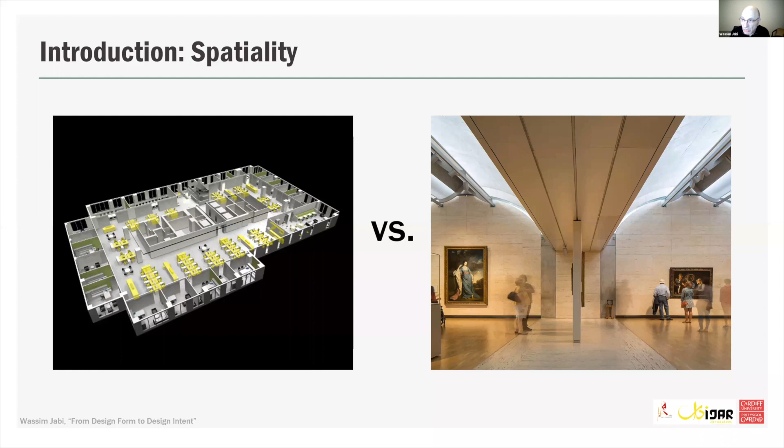The other critique we had of BIM systems is that apart from not paying a lot of attention to space, they invite complexity from the get-go, from the start of the design process. And we as architects can handle complexity, but we don't always have the information to create a complex artifact from the beginning.

So what we do is actually we start with abstraction. We use abstraction as a method to handle complexity, where we postpone decisions, represent things using simpler, more abstract forms, and set a strategy for ourselves before complexity sets in, before we populate our ideas with actual complex building components.

But what we found is that BIM systems ask you to create a very complex set of artifacts, and then they ask you to simplify and abstract it in order to do analysis on it. For example, as you see here for energy analysis, energy models are actually very abstract, simple models. They're just simply graphs, they don't even need a lot of geometry. But what you have is a BIM model with all its complexity, and then you have to simplify and abstract it. We think that is the wrong way around.

So what we have proposed to the Leverhulme is we want to reverse the arrow. This is the term we use, reversing the arrow, where we'd like architects to focus on the strategic conceptual modeling first, and then have software, which is far more advanced than humans at this point, populate these rigorous lightweight models with actual BIM components.

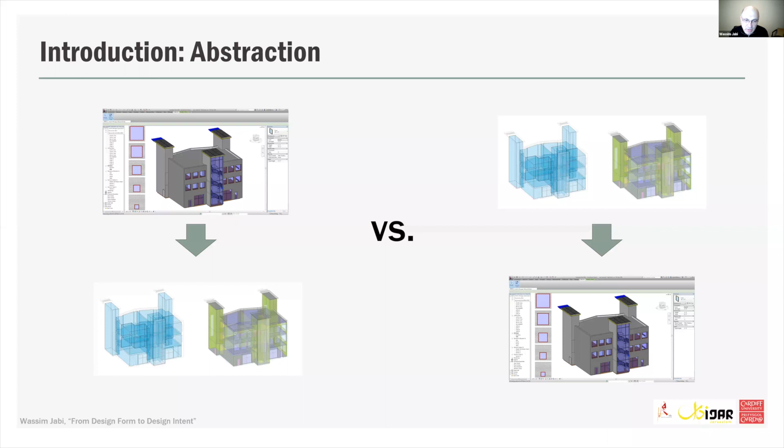And the last disadvantage we saw in BIM systems is that they don't always have what we call awareness. What do I mean by awareness? I mean that the objects you are building in a BIM system do not always necessarily know what is going on even around them.

Topologic, on the other hand, the software that we created, knows about these things. When you ask an entity, it can give you back information about what is going on around it. It knows what it shares with its neighbors, who's below it, who's above it, etc. It can answer spatial queries, as we call them.

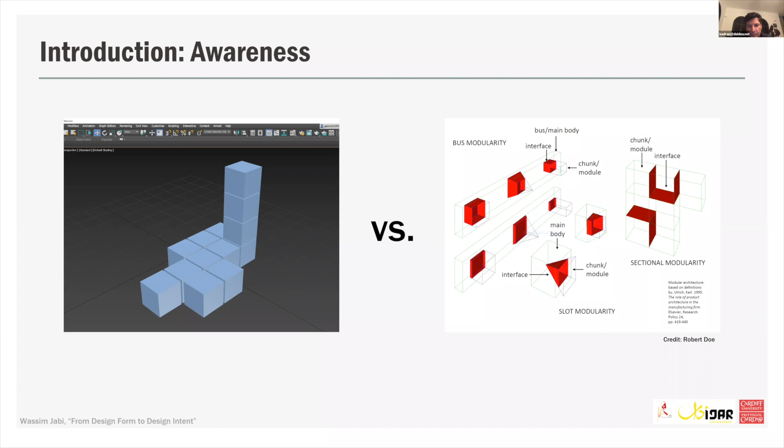But it doesn't have to be that way because, as we know, BIM models are basically graphs. What do I mean by graphs? A graph, in simplification, is made out of nodes and edges, things connected to each other. So in a way, when you look at a BIM model, it is a graph. Everything is connected, we know what things are connected to what, but that information is not made available in a clear and consistent way, and you cannot ask questions of it in a clear and consistent way.

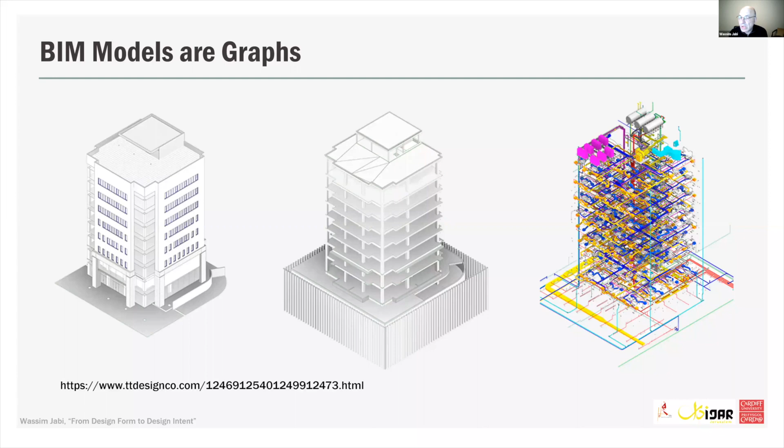So we end up having to download plugins and use ad hoc methods in order to get the information we need out of a BIM system. When in fact, there might be a better way, which is to build a connected graph of your model so that you are always able to answer these questions in a consistent way.

So we went ahead and built this piece of software, called Topologic. It uses some very simple entities, starting from a vertex. Two vertices make an edge, a group of edges make a wire. If you close that wire, you get a face. If you group those faces, you get a shell. And if you close that shell, you make a volumetric entity called a cell, which is our main kind of entity that we deal with.

And then if you group those cells together, you get something called a cell complex, very much like soap bubbles—they have to share faces. And then you can mix and match, put everything together and make it into a cluster.

What is really important to note here is that what I am describing and what you see on the screen is the geometry of the topology we are representing, meaning there is a difference—we delineate a difference between topology and geometry. One example is to think about a necklace or a chain of some sort. If you hold it between your hands, that chain has a curve to it, right?

And it can be quite complex. But when you think about it, that chain has a beginning and an end, has two vertices, right? A starting vertex and an end vertex. The same thing, let's say, for a helix in space. It has a starting point and an end point. So you think of it as an edge, but the geometry of that edge could be very simple, could be a straight line, or could be very complicated as a helix or a chain. So we represent both. We store the geometry, but we also deal with the topology of it.

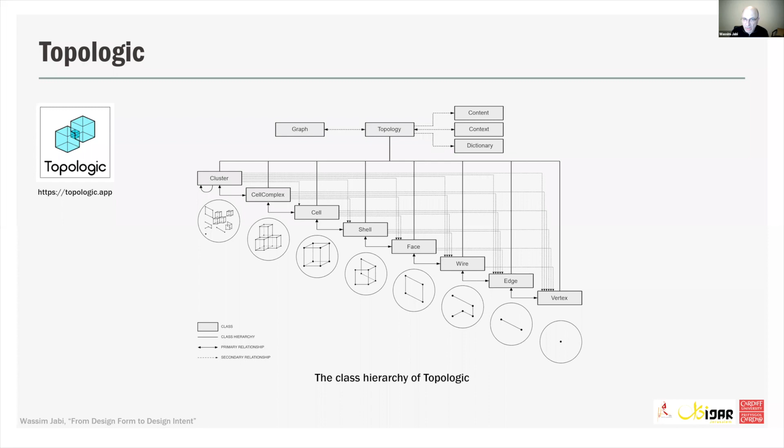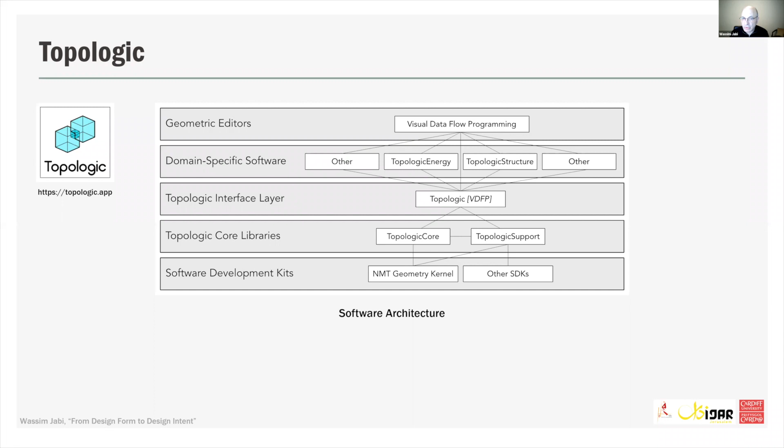So just to give you an idea of what Topologic is, it's quite an extensive piece of software. It's written in C++ at the bottom, and then C#, and now we're moving it to Python as well. And it exists within visual data flow programming like Dynamo and Grasshopper, and we're also exporting it to other pieces of software as we speak. It does Boolean operations, so you can union two things, weld them together. You can subtract one from the other. You can find intersection. That's all normal, but it also does other things which are irregular, such as merging.

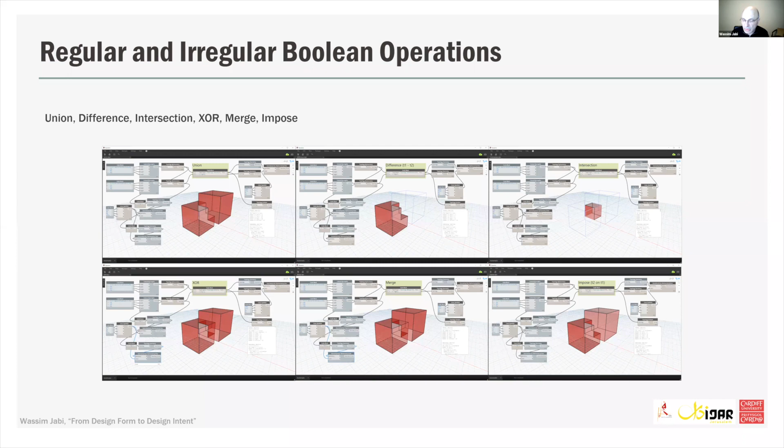So when you merge these two cubes together, you get actually three cubes. You get sort of like one space on the one side, one at the top, and then the small cube in the middle. That is all one entity. It becomes a cell complex, and they are all connected. So you can ask the middle cube, who are your neighbors, and it tells you, oh, I have one to my side to the left and one to my right. And you can impose certain things, and you can do the exclusive or. I'll show you some examples of that.

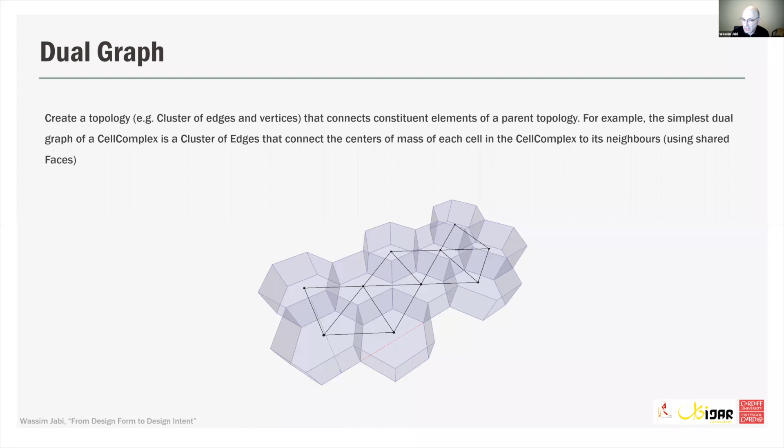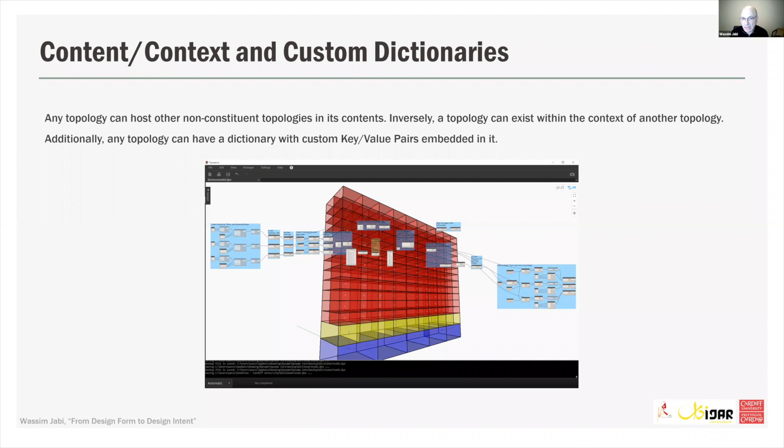The content and context and custom dictionaries requires a little bit of an explanation, and I'll show you. I hope I have the video for it. Yeah, so I'll use this video to explain this, and it will repeat this video a couple of times, I believe. So I will just talk about it. Basically, what you're seeing here is somebody who's trying to design, let's say, a building of some sort, and this person would like to make it into three basic functions. They would like to put retail at the bottom, which is represented in blue, and then put offices on top of that, which is represented in yellow, and then a block of residential units up on top.

If you're starting your design, you probably will design it only with three cells, right? Retail, offices, and then residential. You don't know exactly how they're going to be subdivided, but that's how you would start. So we take that and we put three dictionaries, one for retail, one for offices, one for residential, and that becomes a cell complex made out of these three cells.

After that, we take a cluster of faces and then we slice it. We call it slice it and dice it, basically. So we slice it into many, many little cells, right? It could be hundreds, it could be thousands of cells. These derivative cells automatically inherit the dictionary of their parent, of where they came from. So they know that they were part of a residential block, so they become residential themselves.

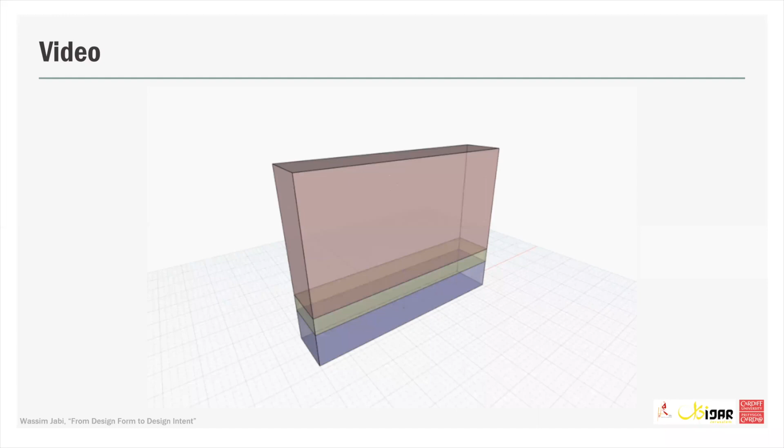So you'll notice that all these small cells now are color-coded correctly. I did not color-code them myself manually. They're color-coded correctly because they have inherited the dictionary of what they have done.

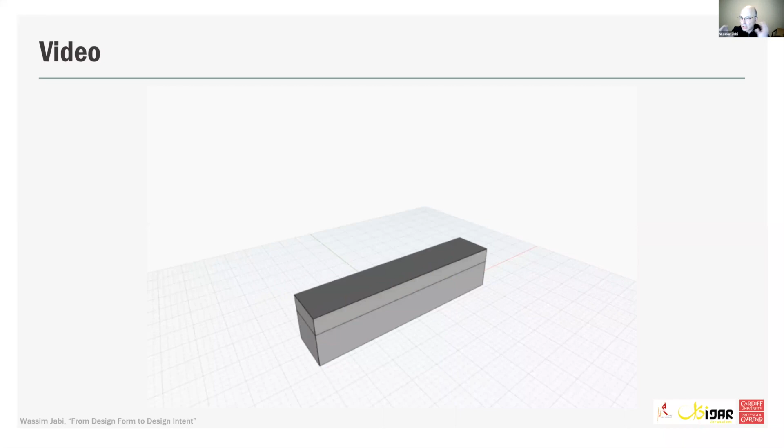What this illustrates is that you can start simple, start abstract, and start strategic, saying, this is what my intent is. This is what I want to do. I want to do a tower where the bottom floor is retail. On top of that, I want to put some offices. And on top of that, I want to put some residential units.

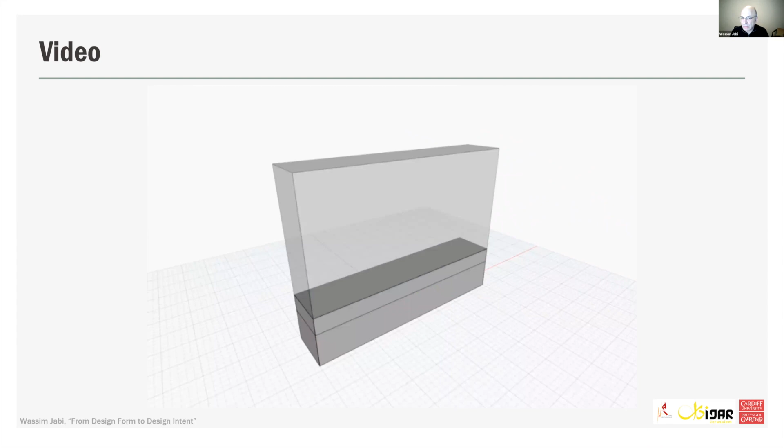And then you leave the detail till later, like how you are going to slice it, how you're going to detail it, how you're going to make the actual building. And that comes from topology itself, from the transmission of dictionaries and semantic information through Boolean operations.

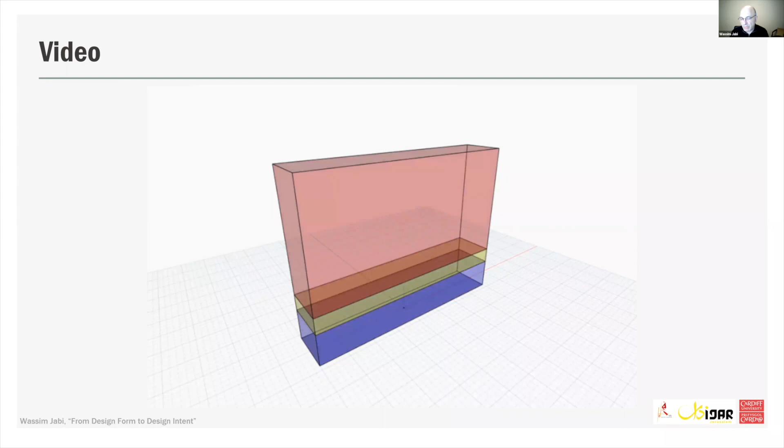We also completely resolve everything. So basically, if you have a building like this and you are imposing this atrium on it, we don't have any kind of duplication, no duplicate surfaces, no duplicate edges, etc. Why is that important? If I am trying, for example, to order from a manufacturer, I want to order my columns, my steel I-beam columns of some sort. I need to give that manufacturer exact quantities.

So I can count, if I tell this, give me your edges, and from those edges, give me the columns, it will give me the exact number. There are no overlapping columns, nothing of the sort. Everything gets spatially resolved exactly as you need.

In this case, I'm imposing this kind of central core on this building, and you'll notice when it reaches the middle, the central column, the central edge disappears and then reappears automatically. And that's all because we do full resolution of the operation.

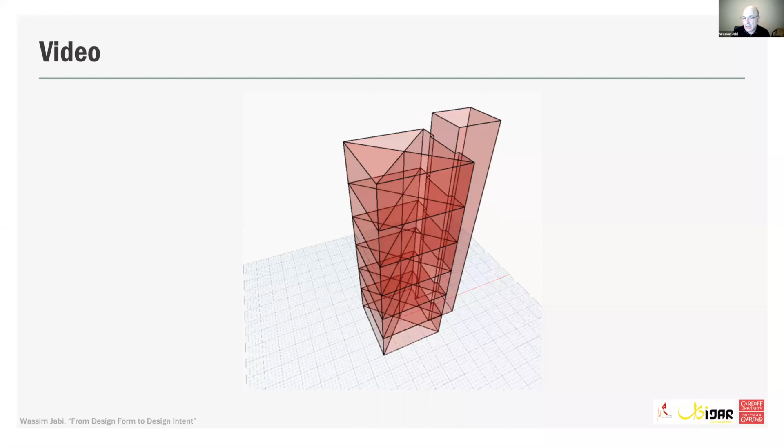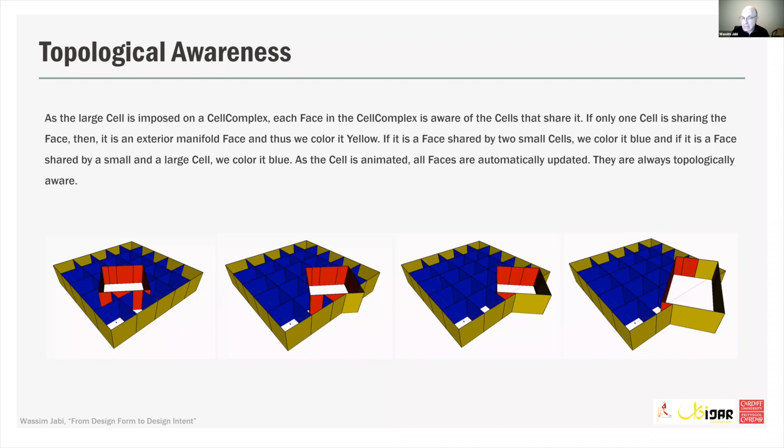In this one, I'm taking a cell complex and I'm asking the faces to tell me what kind of spaces they are bordering. So basically, I'm asking two questions of these faces. The first question is, how many cells are you adjacent to? If the answer comes back as one cell, I color that yellow because these are exterior faces by default. If one face has only one cell next to it, by definition, it is an exterior face.

So I take all the remainder faces and I ask them, how many cells? They say, well, 2 cells. These are all the interior ones. But I don't stop there. I ask each cell on each side, what kind of cell are you? If the answer comes back, I'm a small office and I'm also a small office, A and B are both small offices, I color that in blue because it is a partition between 2 offices.

If the answer comes back, I am between a small office and a large atrium, I color that in red, because I might want to put glass in there, or a different material. The point here is that every entity in Topologic knows the situation it finds itself in and can answer that question. And therefore I can categorize and do analysis on the building based on the answers I'm getting back.

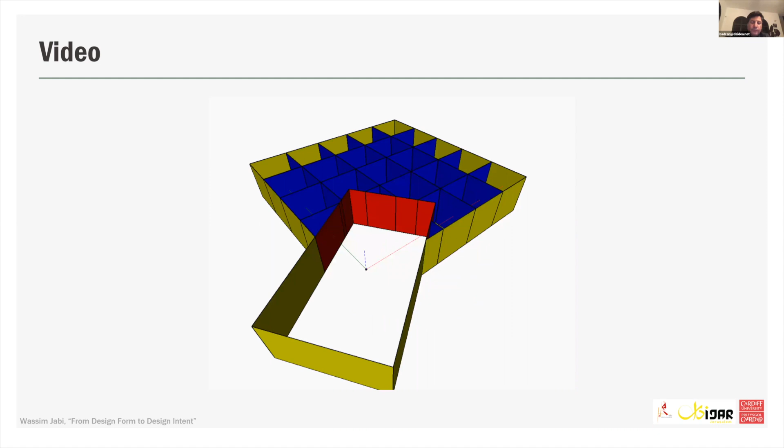So you'll notice that as this little cube is going around and changing its size and peeking out, etc., the faces that are being returned are being automatically color-coded based on the answers to the questions being posed to them.

Same kind of idea here, but what I'm looking at here is private and public. So I am saying you have private and public, or dark and light spaces, that are adjacent to a central atrium that's passing through. And from the adjacent spaces, only highlight the ones that are public, because I want to do something different perhaps with them.

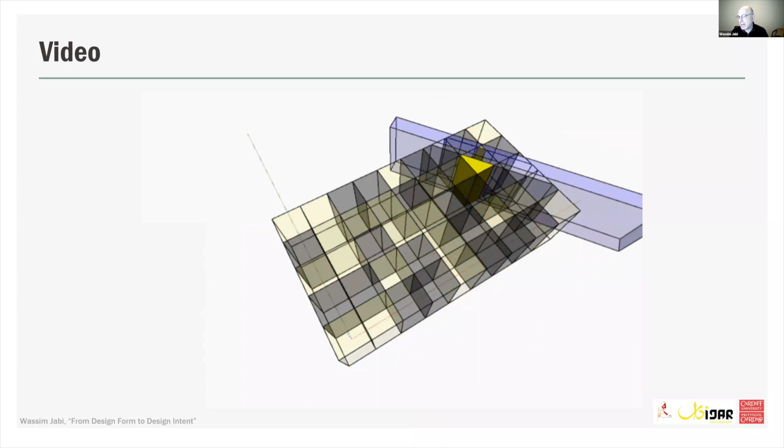This one is based on space syntax. So I am building this cell complex and I'm moving the bars around and I'm asking every cell to compute its topological distance to every other cell in this building. And the ones that have the shortest distance are obviously the most central in the building, because it's very quick to get to every other cell.

And the ones that have the longest distances are the most isolated, the most far cells. So you color code them based on how central they are or not. Centrality and integration is a very standard space syntax type of measure. And if you look very closely inside this cell complex, you see the actual dual graph in terms of the edges and the lines. So you can do graph theory analysis with Topologic.

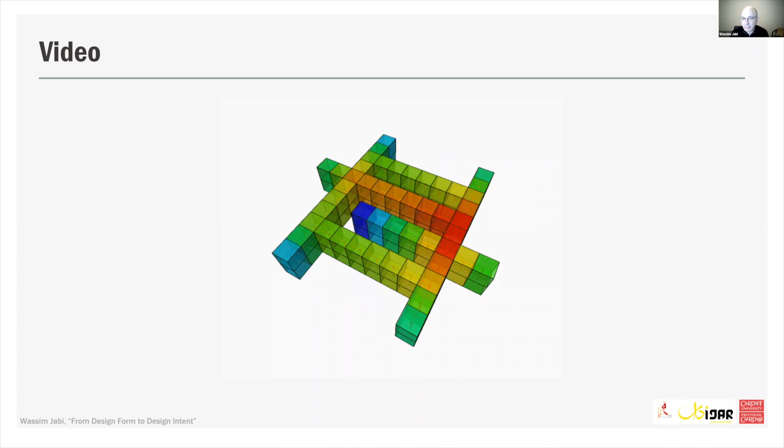So we ran a workshop. I will not bother you with the details. That was part of a paper we presented recently with Katerina, where finding the shortest distance, perhaps, is affected by the topological situation and by the modeling situation. So in this case, we are changing the volume and we are asking Topologic to find the shortest path between two spaces going through the smallest spaces, the ones with the least amount of volume.

And why would we want to do that? That's just an example. For example, if you are routing HVAC pipes or ducts, you would like them to go through small spaces, not go through the big conference room that you spend so much time designing. So you can find the spaces that are more appropriate to route a certain thing. Or you can say, I want to take my visitors through the spaces that are labeled as public and not have them go through private areas. So the semantic information that's embedded inside a cell can inform the result of analyses.

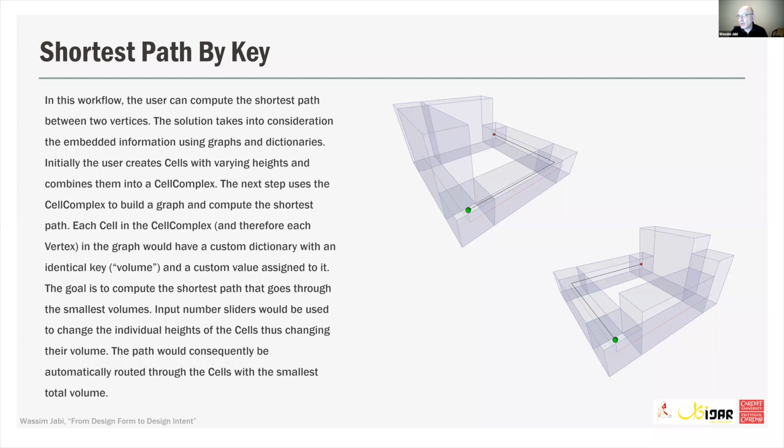And in this one, we are intersecting two objects and we are giving two numeric values to them that will affect the intersection, that red cube that you see. So the height of that red cube comes only from pieces of information that were inherited by the two intersecting bars. So it's not about the height of it, etc.

You can put an arbitrary piece of information, and just because it is an intersection, it will know where it came from, it will know who its parents are, can tap into that information and make a decision about itself. So you can mix colors, you can mix heights, you can mix widths, whatever you want. But the idea is that this kind of information flows through Boolean operations, through a geometric operation.

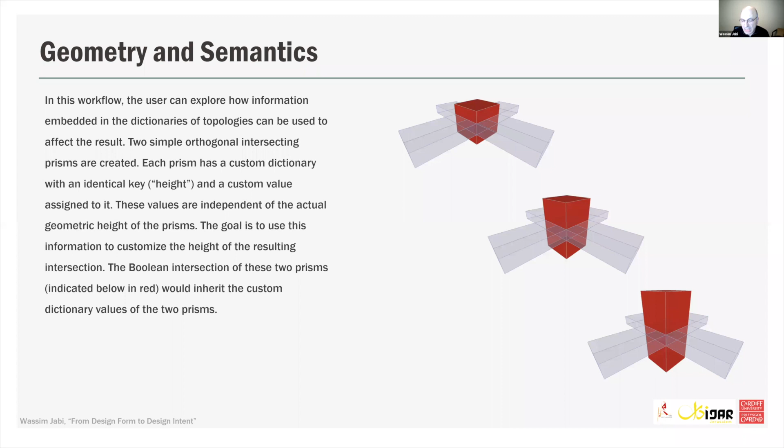So how would we use something like this in a more practical way? So this is an example that I did actually yesterday and today, which is I set myself these types of rules, which is to say a living room that intersects a kitchen gives me a certain volume. If that volume is big enough, make a breakfast area out of it. But if it's too small, don't do anything, just give it back to the kitchen, right? Because you can't do anything with a very small area.

And a similar rule applies when you intersect your living room with your bedroom. If that intersection is too small, just give it back to the bedroom, keep it blue, don't do anything with it. But if it's big enough, make it into closets or circulation or a bathroom. I mean, this is just an illustrative example. So you can write your rules ahead of time, and this is expressed in a Python script. And then all you need to do is insert the dictionaries in the three cells that I have. So I start with a living room, a bedroom, and a kitchen.

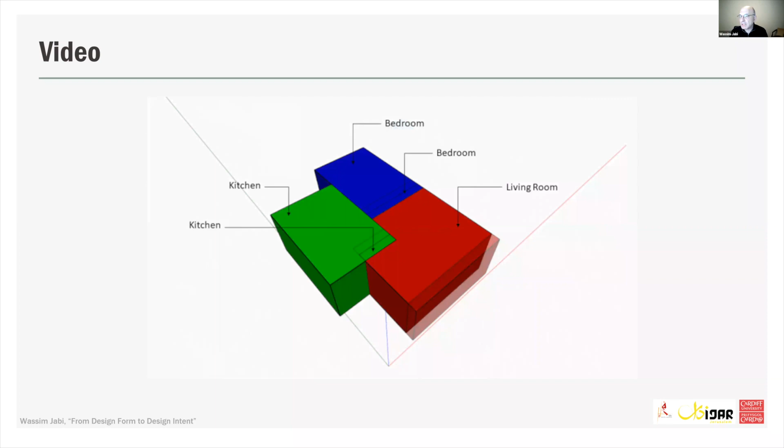And then I start moving the living room around and let it intersect the other two spaces. And based on that intersection, based on what was intersecting and the volume of that intersection, it automatically inserts a new dictionary in that space and says, now I am the intersection of a living room and the kitchen, and I am big enough so I can become a breakfast area. Or I'm in an intersection between a living room and a bedroom, and I'm big enough so I can become circulation/closets.

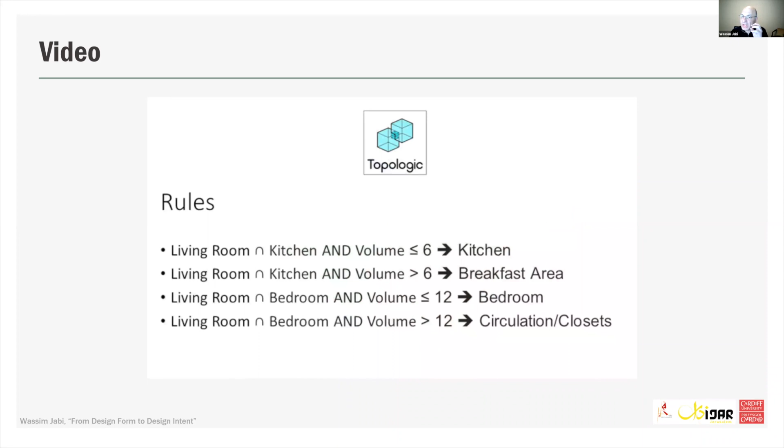At the very end, I look at the cell complex, I get the cells out of it, and I query the dictionary, and I just color code the dictionaries based on what they are saying. If it's a living room, I color it red, etc., and the results come back here. So you can play what-if situations, and it will always reply. So what we have done here is that we have modeled not the building itself, we have modeled what we want to do, which is our intent. That's my rule. This is the architectural language that I have created for myself.

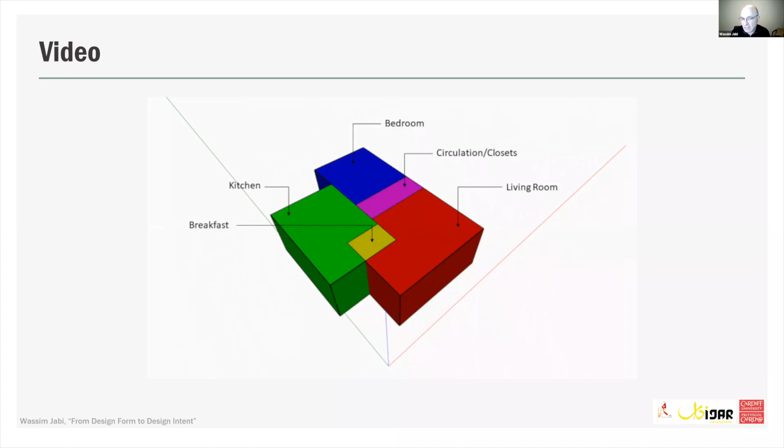So, just some remarks on this: our research has indicated that Topologic can use abstraction as a method to address complexity and provide a formal system for creating, editing, and connecting topologies. Components in Topologic have an inherent spatial awareness that enables them to intelligently react to requests and changes in their surroundings. Topologic shifts the needed information from ad hoc algorithms, like you see in BIM add-in plugins, to formalized data structures and methods implemented using an object-oriented approach. When all these features are combined, you can enable Topologic to support rigorous spatial reasoning and analysis in the conceptual design phase.

And fundamentally, Topologic expands the pursuit of fidelity from design form, meaning we're not obsessed with creating something that looks like the final form, but we are pursuing fidelity of design intent. We would like to model the rules that we are implementing as designers.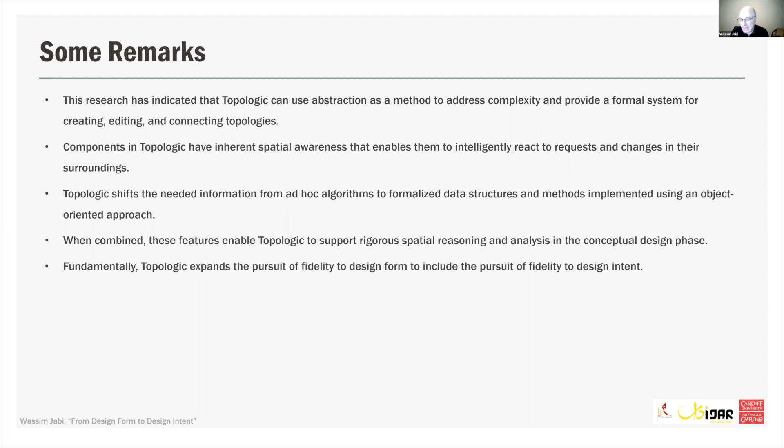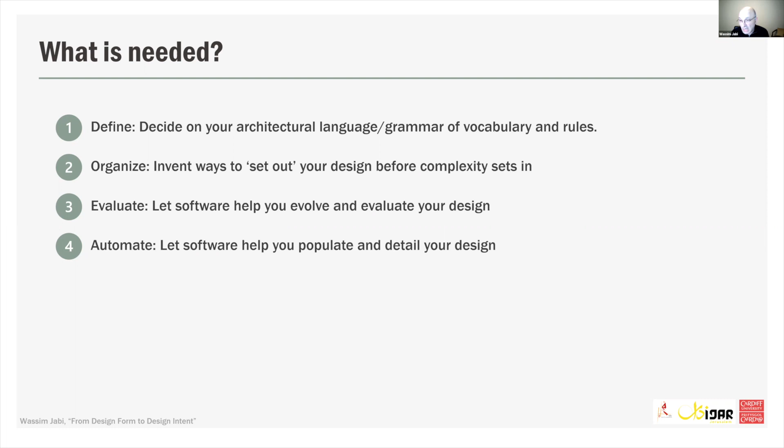And then, as we said, let the software help you populate and detail your design and make sure that that complexity is linked to your original intent. So your focus as an architect and designer shifts from designing form to designing your intent. Thank you.

Thank you very much, Wassim Jabi. I'm very impressed. You are giving the spaces awareness, which is very brilliant. I hope that one day we'll come to a situation to give the machine some intuition, because unfortunately many architects are losing that intuition today. So maybe the machine will solve this issue.

I have just one question. Have you ever tried this on a real project? Right. So we are still at the very early stages. Just to tell you a little bit, Topologic is being used now in a couple of large firms, and it's working behind the scenes, so you don't see it in the front.

Topologic has been integrated into a piece of software. First, it was called BHoM. It exists at Buro Happold, a large international engineering firm. They worked on Zaha Hadid projects and other projects. They have incorporated Topologic in their Buildings and Habitats object Model, and they use it exactly like I have shown to get topological information in order to create mainly energy models.